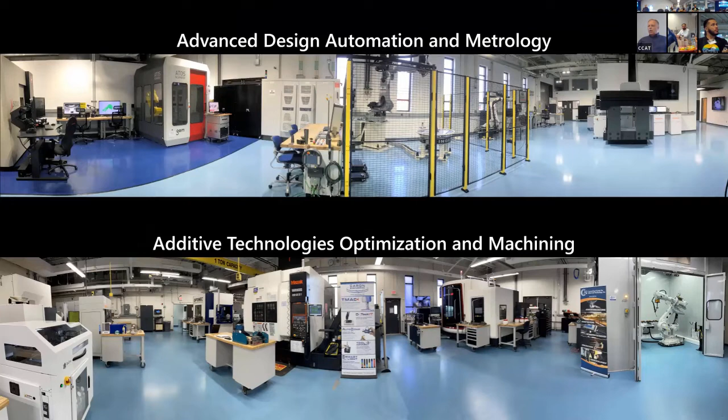So here again, looking out the window is our ADAM lab, from the other end of the room, so you can see a bit more of the equipment in there. The other lab in this building is my lab, the Atom lab—they'll talk more about what's in here. When you look in this photo and combine it with the other area, we have 10 different machines in there, and 8 of them are 3D printers.

So we have the Haas Mini Mill and the Mazak Variaxis—these are the only subtractive machines we have in there. We'll talk more about the DMG, which is kind of both. We also have another lab over at Goodwin University that deals with composites—a collaborative between Goodwin University, Pratt and Whitney, CCAT, and the state. So we're here today to talk about additive—some of the processes involved, some of the types of equipment that we have here.

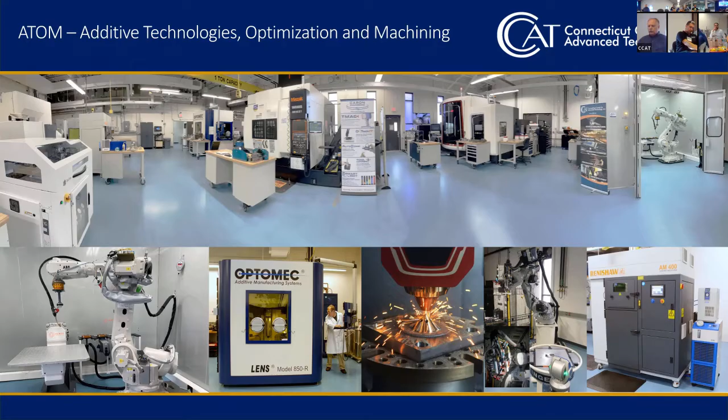So we're going to talk about what is additive.

So before I go any further, who in here uses additive already or has used it? In our tech schools, we have for the last 5 years. Okay, all right. I work in consulting, and a client I work with is applying it to their process and looking to scale. Okay, so it's something that is pretty prevalent.

The technology is pretty prevalent. We're going to beat that to death before we get done, but it's good to see people are using it. So what is it? It's an industry 4.0 technology that uses a CAD model, a computer model, to build a part one layer at a time. It adds material where it's needed. That's how I define it. There's probably other definitions, but that's basically it.

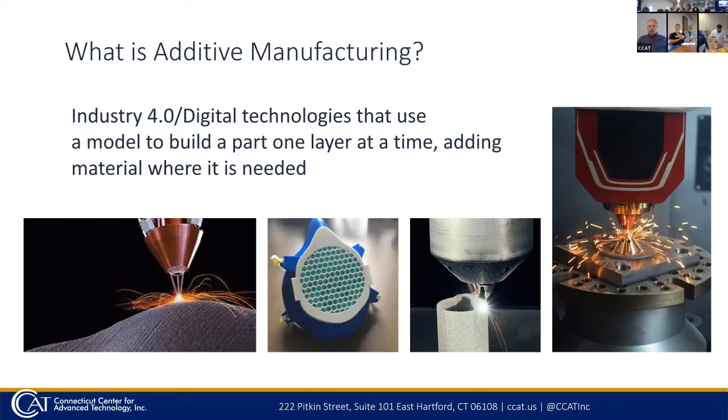What we're going to do is compare that against traditional manufacturing processes, which is what a lot of folks are involved with. Traditional manufacturing is a huge family of different technologies and processes: injection molding, casting, forging, stamping, machining or subtractive like milling, grinding, turning. These are all things that remove material from a feedstock.

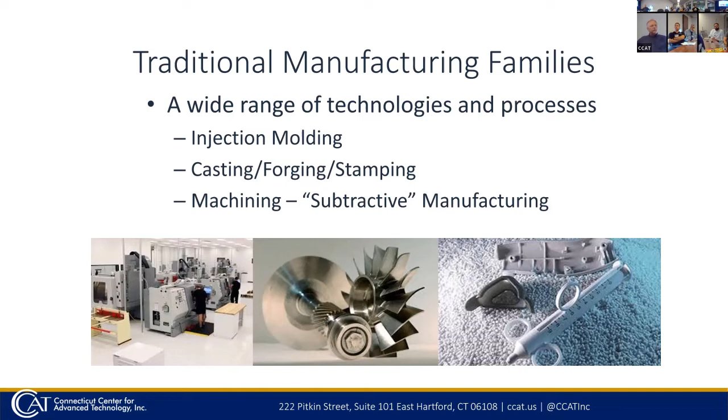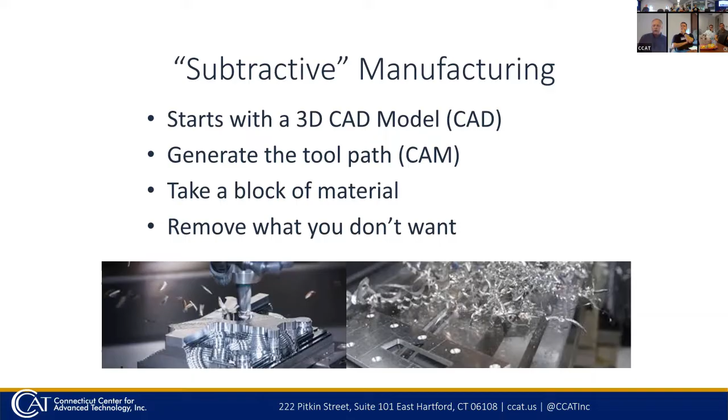So when you look at these processes, we're going to look at subtractive manufacturing and milling in this case. You start with a 3D CAD model—it's a digital process nowadays for the most part. The only thing I can operate, unfortunately, is a manual milling machine, so give me a break for it. But anyway, you generate a tool path. You do your development, look at what tools you have available and what the processes are in order to design the process. You take a block of material and remove what you don't want. Pretty good process—that's the way high precision parts are made today.

And that's the way a lot of parts are made today, and that's how we've made really great things for the last 200 or so years. Since the first industrial revolution, these kinds of technologies have been prominent. One of the issues with it is that you can create a lot of waste material.

We've done projects on our milling machine where we were making a handful of aluminum parts for a company, and I think we ended up with, for us, a lot—like 6 55-gallon barrels of aluminum scrap. When you consider we were making 20 parts, that was quite a bit of scrap. There's also potential for long lead items. If you're finishing a casting or forging, your process may be relatively short, but you can wait weeks or even years in some cases for the casting or forging itself.

We've got a couple of projects we're working on now trying to deal with lead time and things like that—we'll talk more about that. You design for manufacturability of the process. Any manufacturing process you have, you need to design for that process, whether it be additive or subtractive. But a lot of times in subtractive, you can only remove material where you can get your tool into. So you have to make choices between the ultimate design for performance and the design to actually build the part. That's pretty common—at times you have to sacrifice performance or some other aspect of the finished part in order to actually build it.

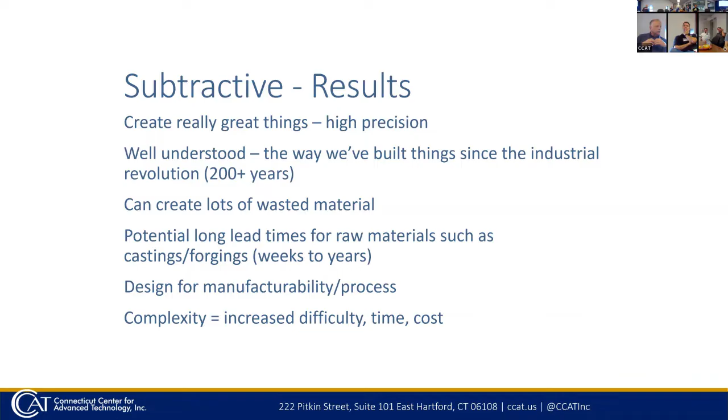And that's part of this process. Typically, the more complex the part geometries are, the longer it takes and the more difficult it is to machine. Is that an accurate statement? Okay, so that's the nature of the beast—the more fixture setups you've got possibly, the more complex it becomes.

Now we're going to compare that with additive. Additive starts with basically the same CAD model—we might have to modify it because, again, we want to design for the process—but it starts with this CAD model. They use programs called slicing programs to do the CAM and generate the tool path, and that controls your deposition, adding material layer by layer where it's needed. So it's a complete opposite view of how to build, compared to subtractive.

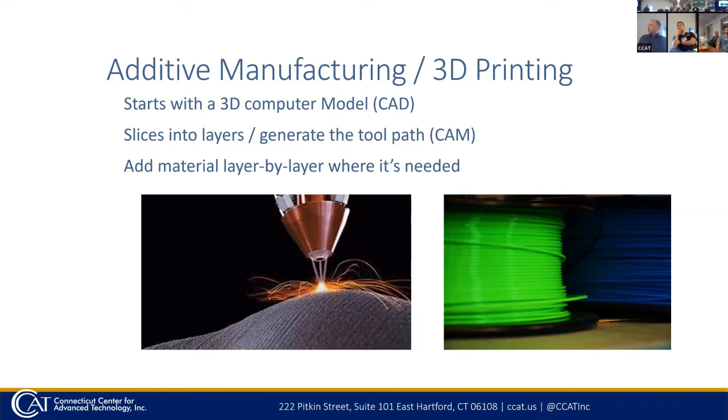Additive manufacturing allows you to make things that can be difficult or impossible to do with some other technologies. As an example, complex internal features are difficult to do with conventional processes.

This is one of the key sentences for this whole thing: additive tools can be applied to reduce manufacturing cost, improve product performance, reduce design and manufacturing lead times, and enhance maintenance, repair, overhaul, and spare parts availability. So that's part of why people are looking at going for additive manufacturing.

We'll probably talk about this multiple times, but there was so much hype around additive manufacturing when it first started coming out. It was going to do everything, replace conventional manufacturing, and the world was going to be a better place because of it. And it's not the case.

Additive is simply another set of tools that are available when you want to make something. There are times additive tools make an immense amount of sense, and times when they make no sense whatsoever—it's harder and more expensive to use that technology than conventional processes. So it's just another tool, and you have to pick and choose when you can use it.

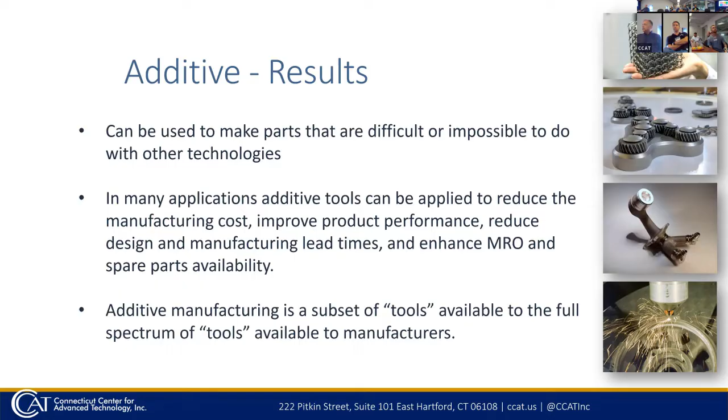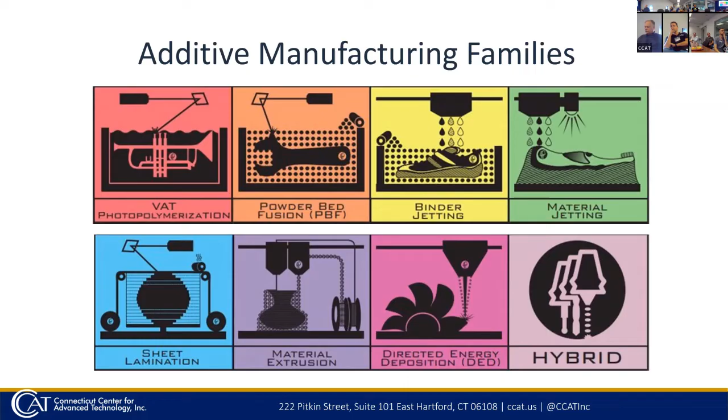When we looked at subtractive, there's a lot of traditional manufacturing processes. The ASTM Standards Organization has defined what these additive families are. There are 7 additive families plus hybrid. Hybrid is simply a combination of technologies, typically a subtractive technology and additive technology combined in one machine. But these are the different families of additive technology—we're going to talk more about those in a couple minutes.

What can you make with additive? Anything and everything. Most people, when they think of additive, think of using plastics. So that's what this guy's for—I've got a bunch of parts up there.

Nylon is a very common material in composites. This guy is nylon with chopped carbon fiber in it. You can do continuous fiber or chopped fiber, but that adds stiffness to it—it's a really nice material.

Additive plastics have been around since the 1980s, and there's a whole bunch of traditional and now some higher grade materials available for plastics—a full range from engineering grade plastics to flexible plastics, inexpensive PLA made from basically corn, to ABS, just a whole range of plastics.

Metals are the same thing. A lot of the machines you'll be looking at when we go down there use a heat source, a laser beam, or they can use an e-beam. Lasers are used for traditional welding processes. The idea of melting metal—basically welding in a very precise, controlled manner—has been around since the 1980s for all intents and purposes.

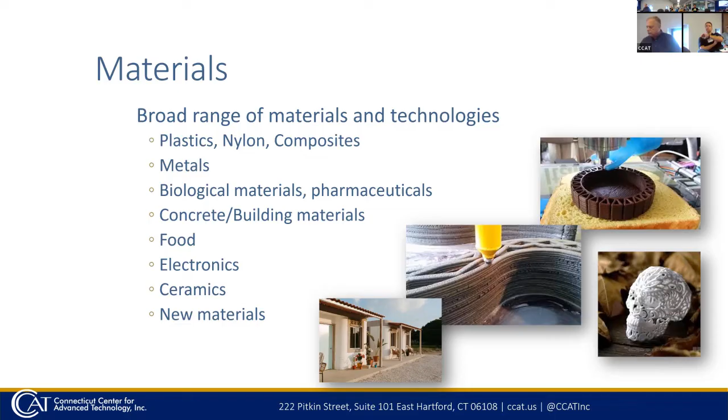All right, so why are people using it? Once again, we talked about the potential to make things faster, cheaper, lighter. This is an example, and there's a part in the middle there that uses topology optimization. This is actually a bracket for a concept car, an electric concept car, and it weighs about 60% of a bracket manufactured traditionally by using these organic shapes. Here's an example, I think this is Airbus related, of a traditionally manufactured bracket versus the additively manufactured bracket.

Create things that are difficult or impossible with other technologies. Once again, this is kind of part consolidation. This was printed from liquid metals, but all of these gears are integral to this system. So this is part consolidation, but it's something that would be difficult with other technologies.

Part consolidation, this is a GE nozzle for the LEAP engine. It started as 20 individual parts that were traditionally manufactured. That means multiple suppliers you've got to manage, and the logistics of assembly. They started building these things additively as a single piece, and then you finish the parts that need to be finished. Last I knew, they had 6,000 or 7,000 of those manufactured.

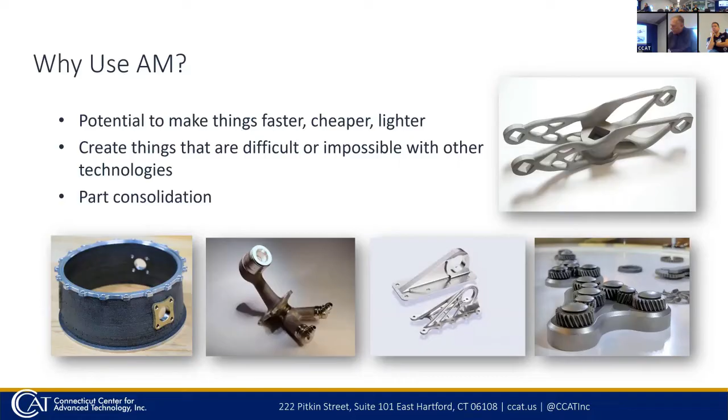There's typically no tooling or fixtures.

Well, hello there. Hey, how's it going? Good, good.

So there's typically no tooling or fixtures involved. A lot of times when you're building, you build in your own support structures, so you don't need external fixtures per se. Once again, designed for end use versus manufacture. If you look at this lattice work structure in the middle, that really didn't take any more time to build and was no more difficult than if that was just a solid block. So it's a very simple thing to do.

When you look at design for end use, here again on the far left is part of a heat exchanger where that was all built as a single part. Free complexity once again, and then very little waste. So when we look at these parts, we kind of hand some of these around to have something here. You can see the level of complexity of a part that you could build, and I don't know how you would build that conventionally. So to me, that's a part that can only be built using additive.

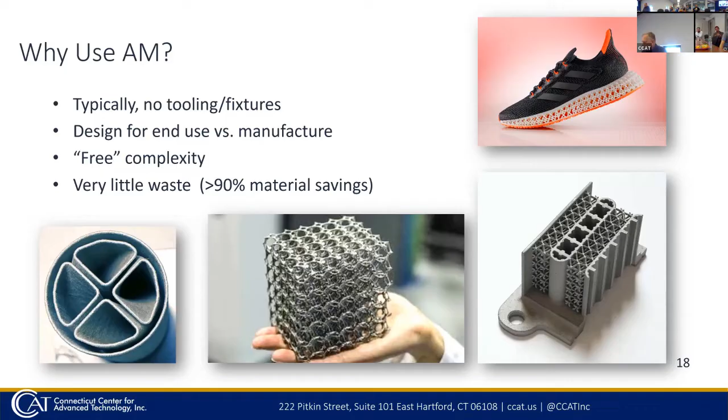The shoe companies up here, Nike and Adidas in particular, are doing a lot of work with high-end shoes being printed. And if you look at the NFL helmets and things, they have that kind of a matrix built into them now to protect the players' heads. A lot of that is being done with additive manufacturing.

So key points: it's rapidly evolving as a mainstream manufacturing tool. It's a subset of tools which we talk about, so it's just another set of tools in the toolbox. And as we said, it's a family of technologies. Some of them are really good at some things, others are better at other things, just like milling is great at some things, turning is great at others. There's a lot of variety available.

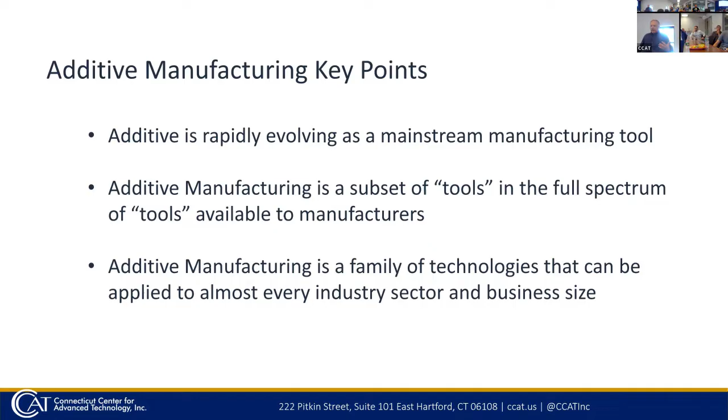So a quick industry overview. Any questions? Okay.

So the additive industry as a whole, and metal additive in particular, is growing at 9 times faster than traditional manufacturing. When you look at that you might say, 'Oh my God,' but when you look at worldwide manufacturing, additive manufacturing is still less than 1% of manufacturing, so it's still a tiny entity compared to traditional processes, but it's growing faster.

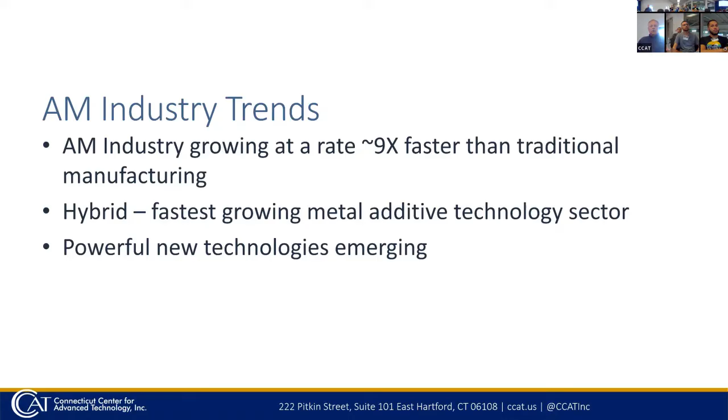So hybrid, specifically in relation to metals, hybrid is growing fastest of metal technologies. We're going to talk a lot about hybrid here in a minute. And there's a lot of powerful new technologies emerging. But the bottom line is that as people understand what additive can and can't do, as the technology and equipment matures and people figure out how to do things better, there's just a lot of growth in the types of equipment and in the kinds of technologies available to you.

So these are just some random trends. Refinement of existing equipment and processes - so everything that the machines are. The first generation machines were pretty much made by companies that said, 'Hey, additive is really cool. If I build a machine that can do this and this and this, I can create something additively.' But they were additive companies, and a lot of traditional equipment manufacturers have realized that additive is up and coming and want to get into the game.

So when you look at DMG Mori, Mazak, Haas, when you look at Trumpf, you look at a lot of different manufacturers, they went out and actually bought these first generation machines. And so the next generation machines are ones that these machine tool manufacturers, who understand building robust machine tools, have made. So the next generation machines are much better.

As an example, we had a first generation machine that was bought by Renishaw. So we bought the first gen, which is basically the same machine that the manufacturer they bought made, and it had no sensors or ability to gather data. That means that from the quality control perspective, you don't have a lot of information to tell you about what you're building.

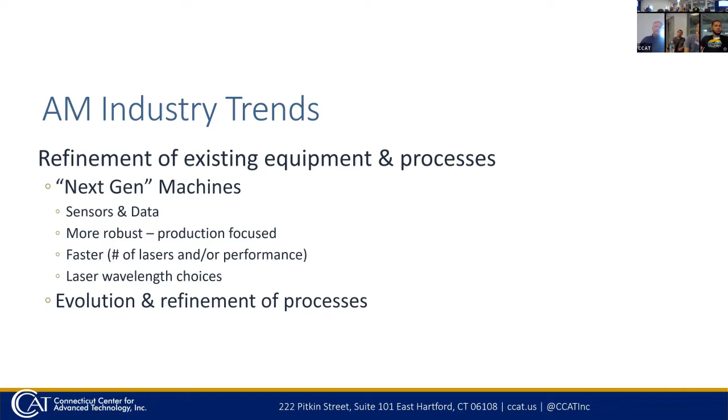Another industry trend is printing bigger or printing smaller. One of the machines that made that hinge has a 10-inch by 10-inch by 10-inch work envelope, so you can build anything you want within that 10-inch cube. They're actually building bicycles in that and then assembling the individual components to make titanium mountain bikes, as an example.

But the idea of printing something bigger than a basketball is huge. There are a lot of different manufacturers making equipment designed to build at a much larger scale. You can build a much larger part, or build a bigger volume of parts simultaneously to speed up the process.

We were talking to an engine and airframe aerospace manufacturer earlier today, and they have some parts that are traditionally done on a machine the size of a basketball. They're printing meter-wide parts, engine casings in particular. They're also going the other way around, making things on a nano level that they haven't been able to do before. It's really kind of cool, both in the high rate additive manufacturing technologies and systems.

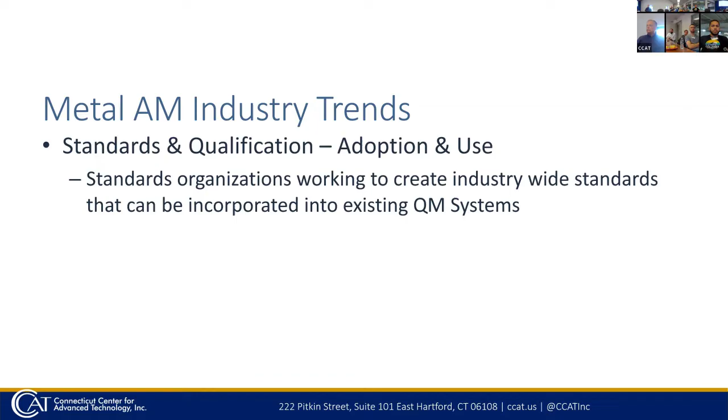It's not a casting in the traditional sense, not a forging in the traditional sense, not wrought in the traditional sense. How does it relate to all these things that the existing standards cover? So what's taking place as an industry is that all these different standards organizations are working really hard to create standards for additive that will let them inspect to these standards so it becomes a more acceptable process. In aerospace, for example, the FAA is very actively looking at how to qualify additively manufactured parts. There's just a lot of that type of thing taking place.

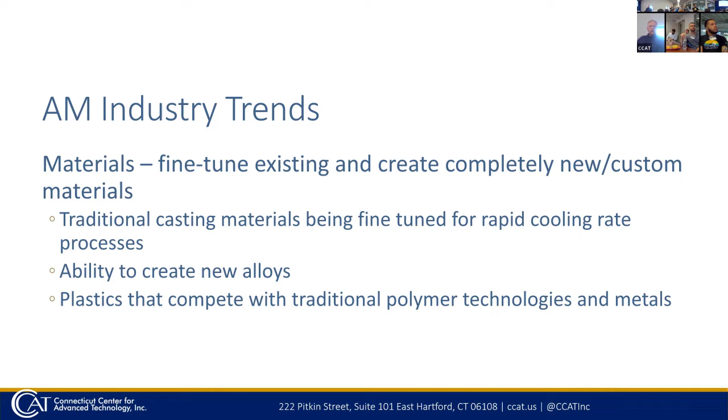We talked about plastics too — some of the new engineering grade plastics can compete with aluminum in particular, and they're lighter in weight. So there's a lot of things going on. What are they using it for? Prototypes and models — additive originally was known as a prototyping technology, and it's still one of the primary uses for it.

You can build something quickly and easily. You can use models to help understand a more complex part. We've heard of machine shops that if they have a complex part coming in, they'll build a plastic model with their printer to see how to fixture it, what it looks like, and then get it figured out before the part arrives.

Aids to manufacturing. This is a fixture that we built for a company. I love this thing. That's a big part. We're going to talk more about all these as we go on, but bridge parts and repair.

A lot of times when you talk about a repair, somebody wants something that's qualified and meets all the specifications of the original part. And that's great, that makes a lot of sense for making a permanent repair. But what if I just need to get my Humvee back to base, or my helicopter back to base? Can I use a bridge part to get me where I need to go that doesn't need to be fully qualified? People are starting to have that conversation.

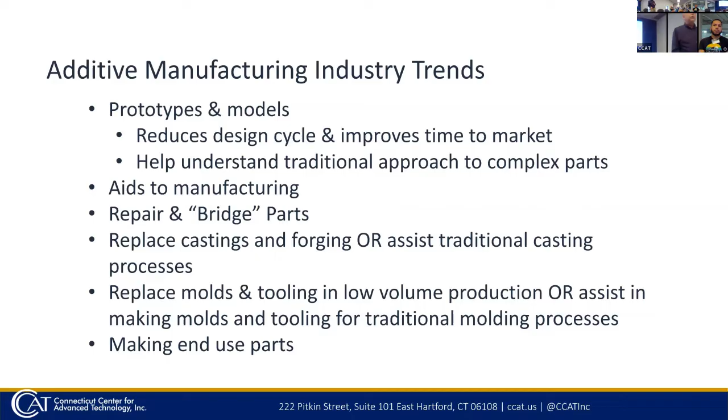So this is a key concept as well. There was a lot of hype, a lot of fear about additive, and it's waning. The reality of what you can and can't do with it well is starting to come to the forefront. People are understanding more how to take advantage of it, how to use it, when to use it, when not to use it. That's why I think it's really starting to advance very quickly as a traditional tool, or as a tool.

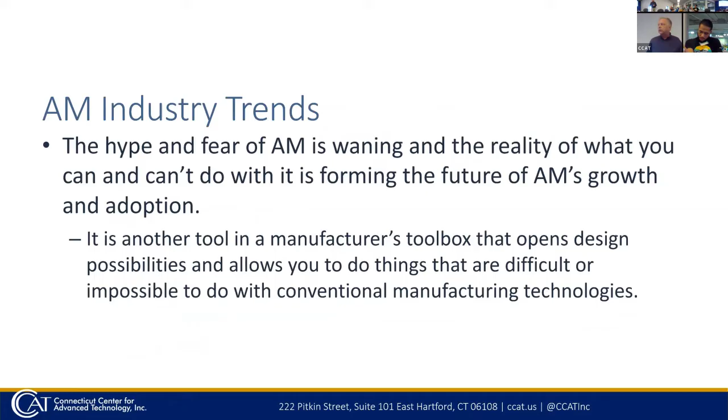I was at a conference last month about additive manufacturing. The people there obviously had a vested interest—half of them were doing additive, the other half were just exploring it. When they asked people how they're using it, 35% were actually making end-use parts with it. That's huge in my mind. 15% were making tools for others, 45% were using it for internal tooling, and 68% were using it for prototyping. So here again, it's a very common application.

Of those people, almost 70% said they're using in-house capability—they have printers in their business. 18% farm out their work entirely, and another 12% do a combination thereof. Their thing was: additive is production without tooling. I think that's a great concept.

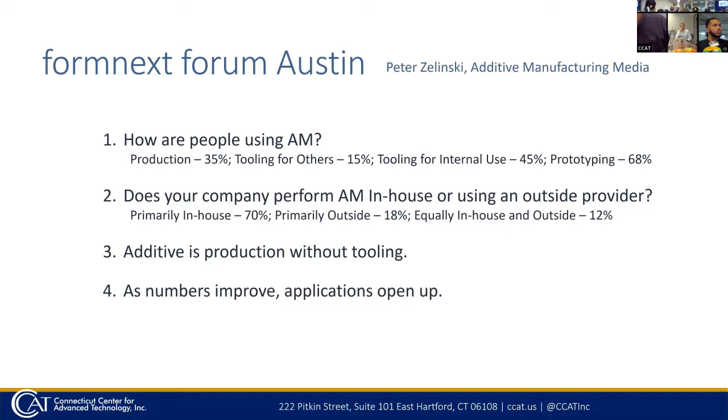End-use parts—once again, a wide variety of applications. These are just some quick samples of stuff, from the aerospace industry, clothes and colors, medical industry. This is actually the part we built that we'll talk more about for the nuclear power industry, and oil and gas. All these industries are using it to build end-use parts.

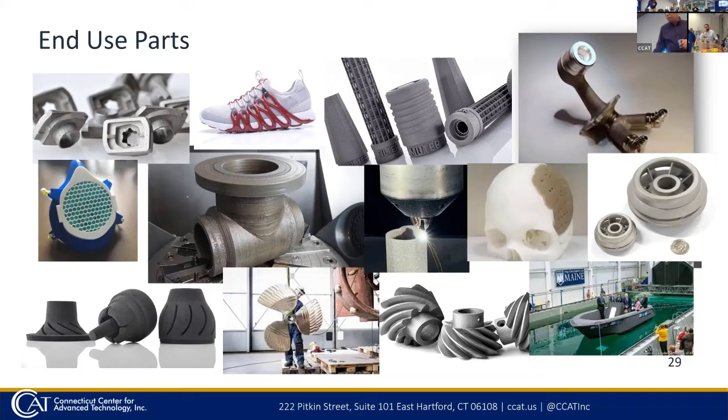Aids to manufacturing—fixtures, jigs, assemblies, anything you need made for manufacturing. I'll pass this around, but I love this. This was a fixture for a company that makes electrical cables. They wanted a method for stripping insulation off the end of the cable, and one of our interns actually built this fixture. He designed it and printed it. It took overnight to print, but that has about $1 worth of material on it.

So I love these. Do you guys know what this art is? It's face shields from the pandemic.

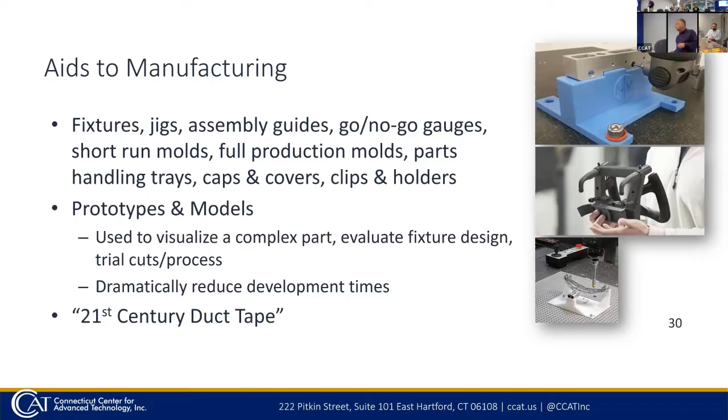There's a wide variety of materials - some of the parts, like we have a Markforged down there, I'm not sure about the others, but you can stop in the middle of a plastic build and add metal inserts and then keep going.

It's cost effective. We've done a number of molds for companies, either for short run injection molding or just for pouring urethane or silicone in, or whatever.

Easy design mods - just put numbers in. We've seen these actually used at customer sites where they've made fixturing or whatever in their process. They put a serial number on it so they can track it in their quality system, and they just print all that in one time.

This is a robot gripper, which is a great application for it. This is a polymer, so it's nice and lightweight, and then this is actually an additively manufactured tip for it, so when you wear out the tip, you just switch it out.

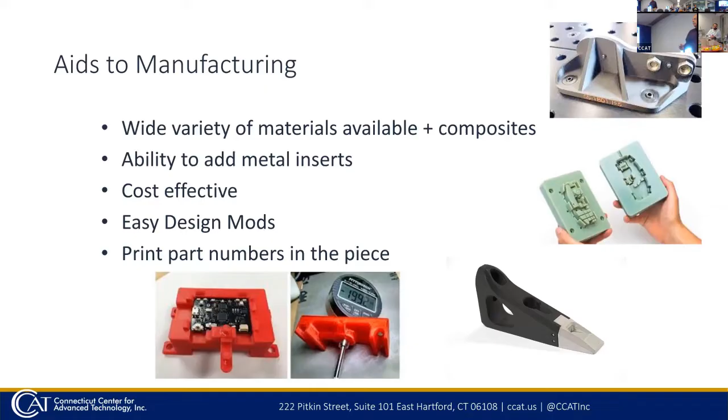Unavailability and legacy parts here again. We've done a lot of work for the Air Force, like with the TF-33 engine. The last new one was built in 1969, so they make some new parts for it, but most of the stuff ends up getting repaired. The Air Force is looking at this 21st century technology to help them do repairs easier and quicker. What takes them hours to do conventionally, we can do in literally a few minutes. So they're very much looking forward to it. And then we talked about the parts.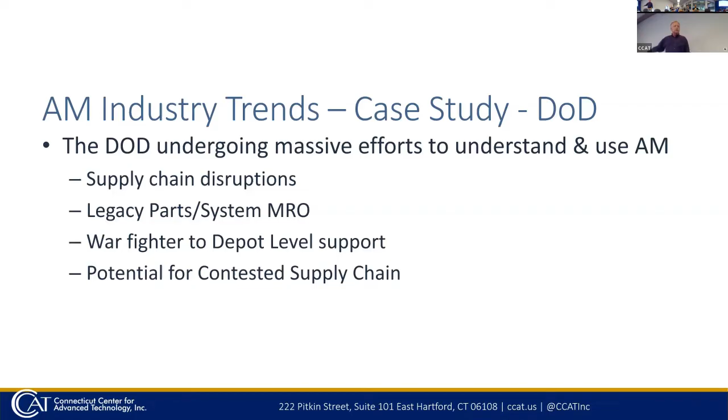Since World War I, basically, we've had pretty open access to our supply chain. Even though we had submarines blasting our supply ships out of the water, most of it got through. But in the future they're concerned about our ability to keep a supply chain going in a contested environment. So the idea of being able to make parts where they need them, when they need them, is an important part of their policies and processes going forward.

So once again, machines have been around for a long while. They're changing, they're getting better. Materials are getting better, and so are the advanced tools.

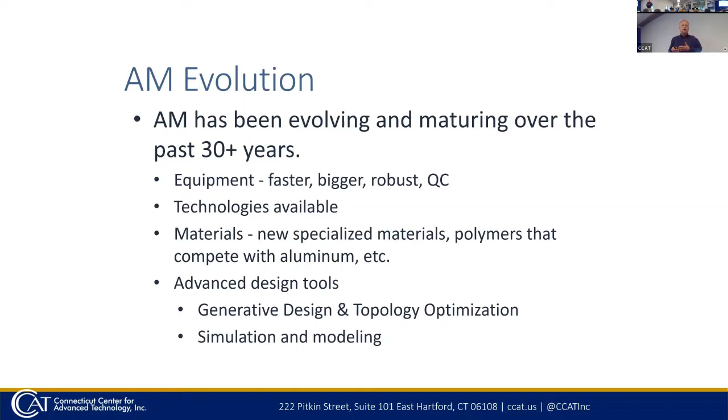We looked at sample lightweighting, the ability to use generative design or topology optimization to lightweight parts. These design tools can help you consolidate parts. We talked about GE's LEAP engine nozzle, but they have an engine they're working on where they've taken, I don't know how many parts are in the engine altogether, but they've taken 812 parts and condensed them into more complex assemblies. Now they have 12 assemblies instead of 812 discrete parts, and they have to use this kind of technology to do that.

Most of this we talked about already. It's not going to replace traditional manufacturing, but it has the potential of being disruptive in many applications. Bottom line is good too.

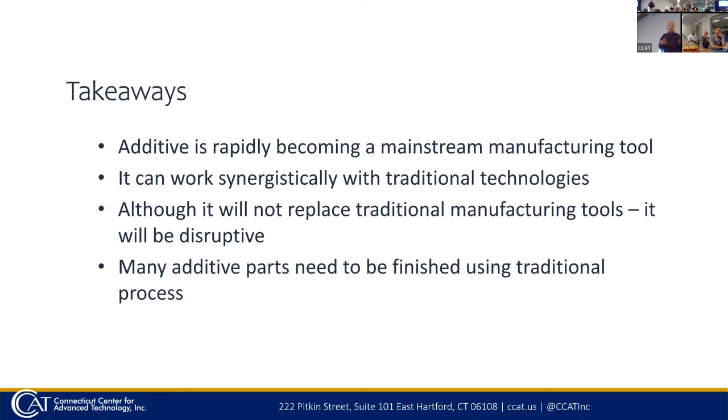Many of the parts need to be finished using traditional processes. Anything we make in metals, if surface finish or dimensions are critical, you're still going to have to probably do some kind of post processing. So traditional manufacturing may shift into supporting this, more as a finishing process than a roughing process. In fact, a lot of additive companies that sprung up just to do additive manufacturing have actually bought machine shops in order to do that. And some machine shops have adopted additive manufacturing technology so they have both available in a single place. That's a really powerful business thing.

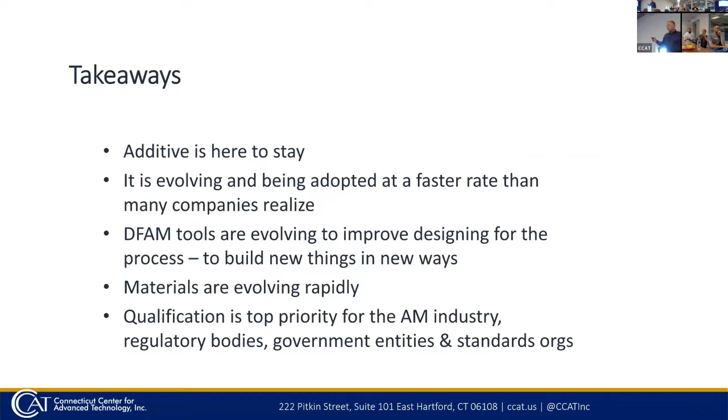It's here to stay, it's not going away. It is evolving and being adopted much faster than many people realize. We talked about the designs for additive manufacturing, design tools are changing as well. We talked about qualification, but to me, this is important.

Every major corporation in this area—obviously aerospace and medical are big—but every major corporation in the world, for all intents and purposes, every state in the U.S., and every industrialized nation in the world wants to be a leader in additive manufacturing. When you look at what's taking place in China, Japan, and the European countries, even in some South American countries, there's a great emphasis on additive and bringing that technology to them.

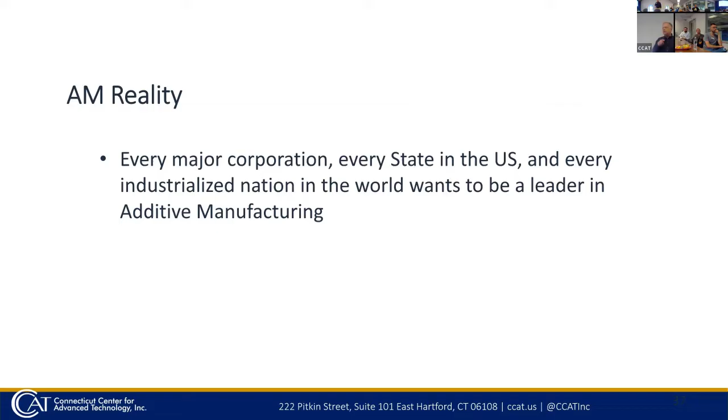All right, everybody all right? I've got probably a lot more slides than I have time for, so we'll take a quick look. Most people that start in additive manufacturing start in plastics - it's the easiest, it's your hundred dollar printer.

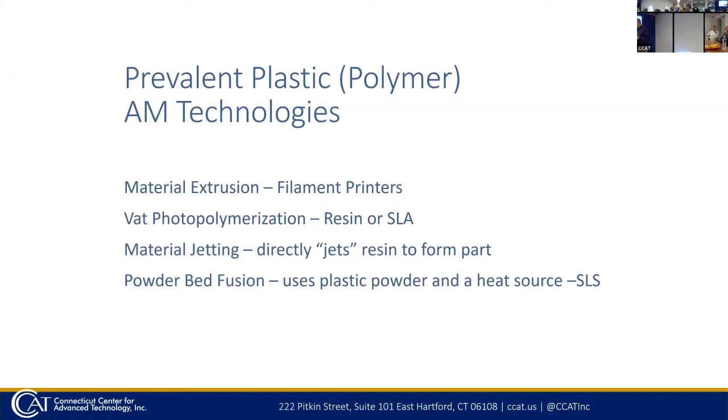When we look at that family of technologies, here's their official names and what they are. We'll take a quick look - this is the most prevalent technology: material extrusion filament printer, so your Ender or a million other different types of printers. You can buy material here for a few dollars a spool, made from corn basically, up to several hundred dollars a spool for engineering grade materials. So a wide range of materials. This is one of our printers.

This is the one downstairs, our Forge - this is a Prusa. When that was new, I think it was a thousand dollar printer, that's really what it did. One of the guys mentions he just bought one of those for work too.

So this is actually a model that we printed - an aircraft fuel component from an antique aircraft. We scanned this in with our 3D scanners and then printed the part from that. This is a part made from Ultem, part of a duct system. This is as strong as aluminum at a fraction of the weight.

This is a fixture that we made, it's got a curved surface - I'll show you the part that this held. But once again, how would you manufacture that? How long would it take you to machine it? That's probably the bottom line, and probably the other way you'd do it. So there are a lot of reasons for this.

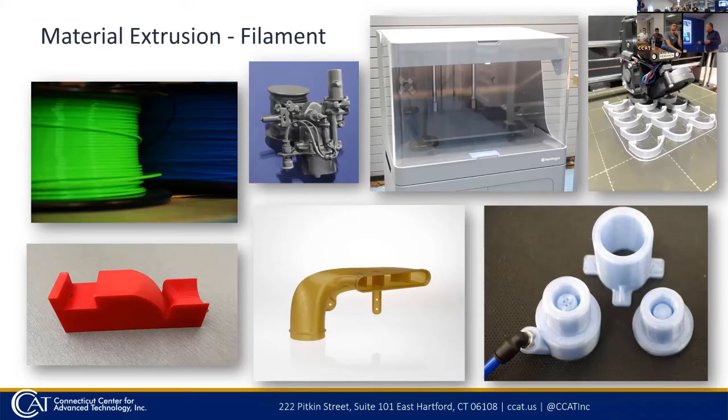Here again, the materials range from a wide variety of traditional plastics to flexible materials, and things like that. So depending on what you're doing, this may be an alternative - we can talk more about that individually.

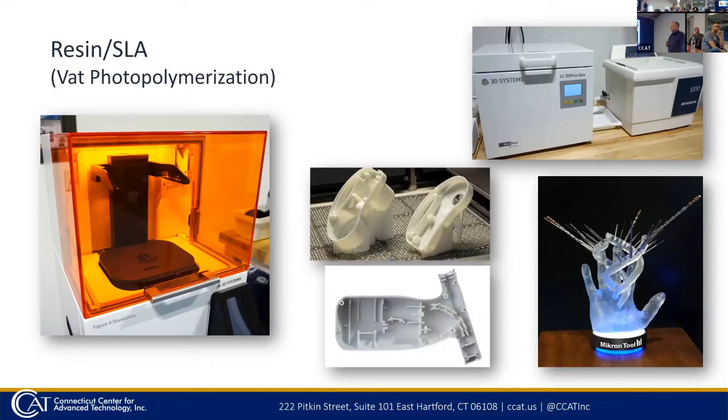Material jetting - this is traditionally thought of more as a manufacturing process rather than a prototyping tool. I don't know any shops that have one of these, though I know service providers that sell parts from these for a living. In this case, the material that's jetted is the actual build material - it's a plastic polymer that's UV cured, adding another layer. It sprays material where it's needed to create the part. The beauty of this is you've got multiple colors available and multiple durometers of materials available.

You can also change durometers, so you can mix materials that are flexible and ones that are stiff, and vary the mixture to create different durometer levels. There's actually a medical application we're studying, making models for doctors to practice surgery on. Each of your tissues has a different sponginess, so they've explored how to vary the durometer of the materials to match the real tissue, so it looks and feels like an actual surgery.

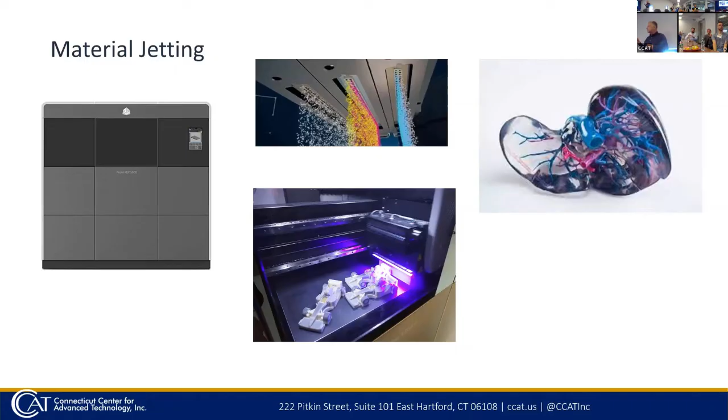Interesting, and powder bed fusion, so selective laser sintering. There's a number of plastics and materials that they use, possibly one of the nylon ones. You start with a bed and a plastic powder, and a laser beam writes across it, melting that layer, then it drops down and spreads a new layer, melts it, drops down, spreads a layer. Particularly with the nylon materials, you can create incredibly robust parts with this, so a lot of people use it for end use production.

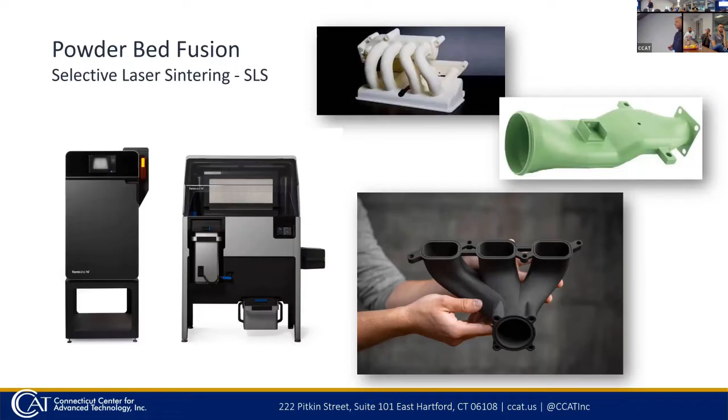Each of these machines has a bunch of different manufacturers, different sizes, different features. Any questions on the polymers? That was kind of a quick dive.

On the metal side, once again, these are the families. Some of them are sinter based, we'll talk more about that. Some of them use a heat source to actually melt the powder, typically a laser or an electron beam. And some of them don't melt anything - the solid state process is a good thing.

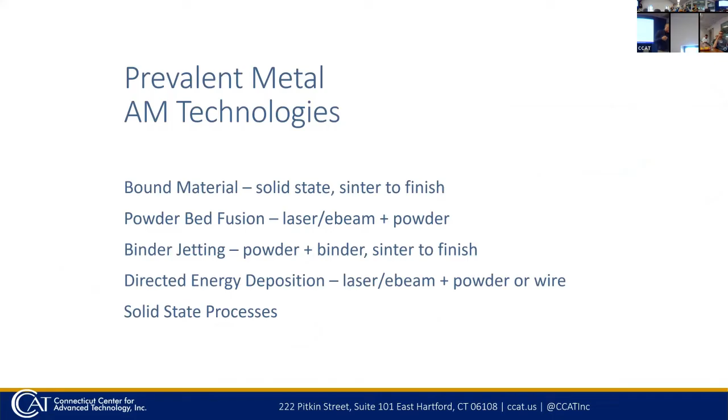Bound metal - when you go out in the lab, we'll take a look at it. It starts with a filament typically, or a rod. Some use a slurry or a liquid, but the ones that use a rod or filament look like a plastic printer. It's using the same technology, except the filament is a waxy polymer that's impregnated and filled with metal powder. You're actually building a part that you then end up debonding and sintering to solidify.

This is an example made from copper - a heat exchanger with a part built into it. That took a few hours to make, and then had to go through the sintering process, which is I think a 2 or 3 day process. In between you can see this white material - this is the boundary layer, using a ceramic material that lets you just snap it off. So you don't have big problems with support removal like some of the other processes. This is a part that was made with it.

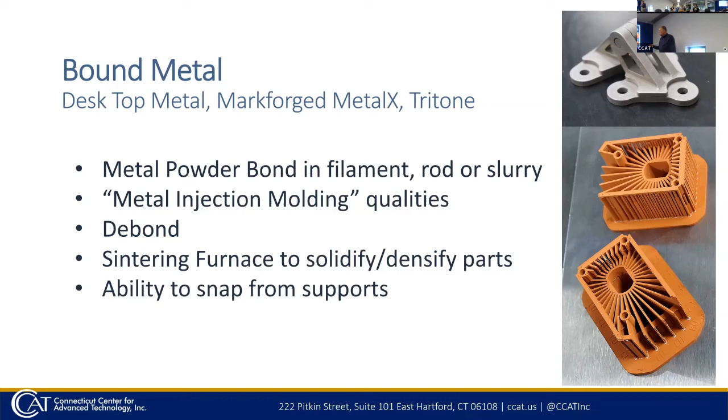We'll take a look at the process real quick - this is the Desktop Metal system. Instead of a filament, they use a rod. You print it with a printer here, just like a filament printer, it builds a part, and then you end up with results similar to MIM.

That's an important thing to know - the rods come in common materials. I think it comes in 17-4 or 625, and a tool steel, though I'm not sure which one. Many different common materials are available.

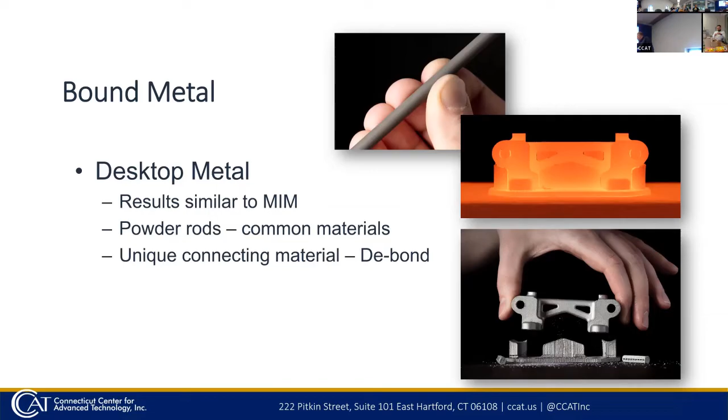Here again, we talked about the bonding between the two layers - it's a ceramic so that it'll break easily, then you sinter it. Compared to other metal processes, this is really fast - really fast when you look at the printing. When you add in the rest of the processing, it slows it down a little bit, but we're going to talk about that.

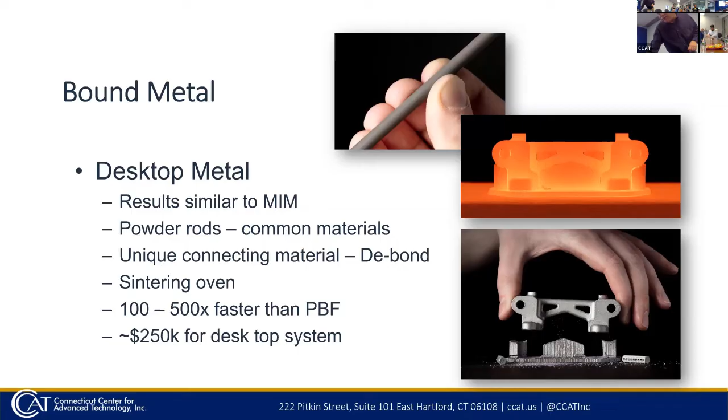About 250K to get started, so this is on the low end of the metal spectrum, making it more affordable for some applications. Here's the case study for this - I can tell you this is an EDM shop over in Farmington.

So they were spending $250,000 a year in tooling from outside sources. They started using bound metal systems, the desktop metal one we were just looking at, to build their fixtures and tooling. Every one of their EDM machines, and I think they have close to 100 of them, need metal fixtures and tooling.

They showed us a part that they made using the desktop metal system. It took them 3 days to print it, 4 days to sinter it, so a full 7 days of processing time to build the fixture. They took it out of the machine and had their shop either EDM or machine it wherever needed, or put in inserts for cap holes or whatever.

The total cost for them to do that themselves was $200. They had paid an outside company $1,200 to make that fixture, so that's $1,000 savings. Their return on investment was 9 months - the machine paid for itself.

They were able - this isn't necessarily a good thing - to get rid of their tool maker, but they helped him get another job. Tool makers are hard to come by, so he wasn't hurt by it. Now they're building almost everything in-house with that added piece of equipment, and they still send out a little bit of stuff, but not much.

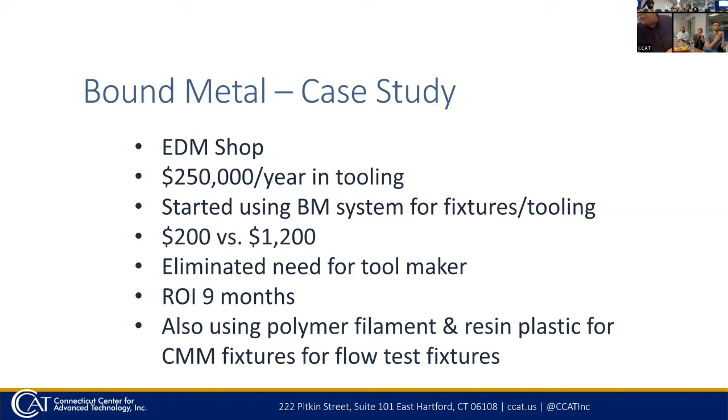All right, any questions on polymer?

Here again, several companies available. There's some really cool things.

All right, powder bed fusion - that's the machine we had downstairs with the 10-inch cube. It starts with a flat build plate and spreads a thin layer, about 50 microns thick, of metal powder. A laser beam steered by a mirror system directly melts the powder layer by layer - drops, spreads, melts, repeat. When you're done, you have a box filled with metal powder with your parts in the middle. It's probably the most prevalent technology in use today for building metal parts.

This is a part we were talking about earlier - this is GE, a meter-wide part. That's the state of the art right now, about a meter cube that they can build parts in.

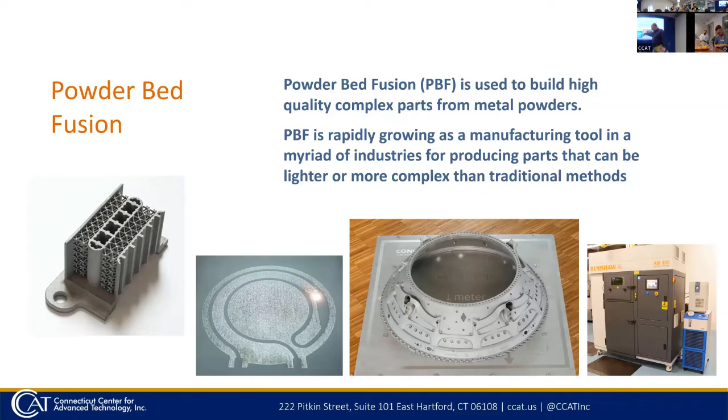So these are some parts that we've done here. This one in particular is a catalytic converter for a fuel cell company, and it has 750 micron holes that run the length of the part. They originally wanted us to just build a bunch of these and weld them together, so we said why don't we just build this as a single piece. We built it as a single piece, and all we had to do was weld the cap.

We talked about casting replacements - these are a couple of pieces that were normally cast, for a company up in Enfield. They needed about half a dozen of these to finish a customer order, and it was a 6-month lead time for their castings. There are probably other processes you could use, but we were able to hand them the parts in 2 days, and we did 25 of them.

This is a prototype - anybody guess what that is? An ice cream scoop. So we work with all companies, all technologies.

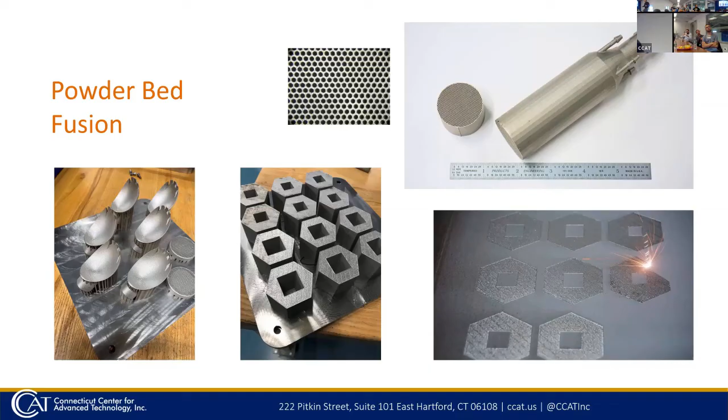Once again, most of the sinter-based processes give you the equivalent of metal injection molding, so it's not necessarily fully solid. Some of them you can actually infiltrate with bronze, so there's some marine applications where that comes in really handy. And you can not only do metals, but you can typically do ceramics.

That's the technology that the casting people are using to make molds with as well, sand molds. So once again, if casting is the way to go, that's fantastic. But if you need one, or you need 6 or 10 of them, you don't need a mold to do that. You're direct printing it, so it gives you the ability to do that.

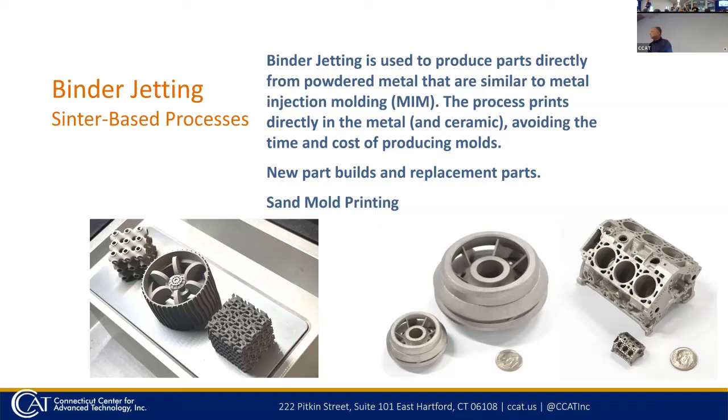Okay, directed energy deposition. This is another of the technologies that we have here. In this particular technology, we start with a build plate, and a laser beam comes down, forms a melt pool, and we're blowing metal powder into it. Then it moves up, and we do another layer and another layer, until you end up with your finished part. You can see this is quite coarse, we make pretty big layers with this, so it's quite a coarse finish.

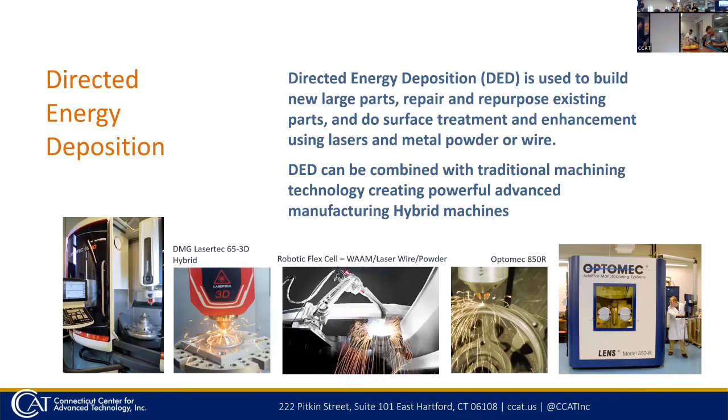So once again, some kind of post processing of surface finish is important. But that's a piece made from titanium, a part of a tool that we made for somebody. Once again, I don't know, you have to explain that maybe. And once again, what would the dies cost in order to achieve that? So we have a number of different pieces of equipment, and we're going to dig into a little bit more.

So they're using it for new part builds. All these can be used for that. We do a lot of repair work with ours.

One of the cool things with this technology is that we have multiple hoppers on the machine, so that means we can spray different kinds of materials. You can mix them together and help people develop new alloys. But you can also start with one material and then braid off to another, or switch between materials - the idea of a functional graded part. If I need heat resistance somewhere and abrasion resistance somewhere else, the possibility is there to do that. It would be very hard to do that on a commercial basis right now as far as quality control and utility goes, but there's a lot of people looking at that as a potential process.

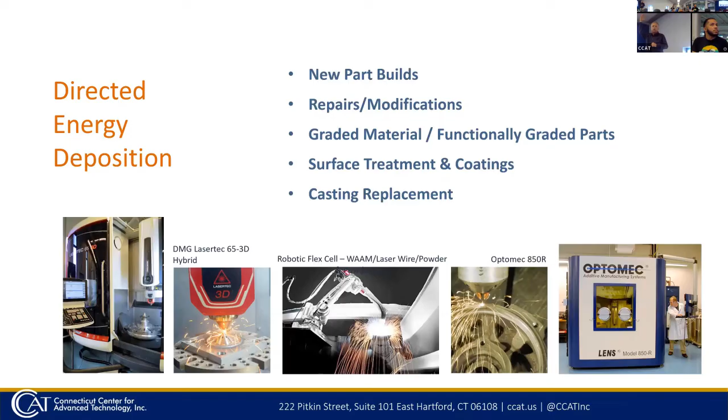Surface treatments and coating - one of the earliest uses for this technology is cladding. This technology has been around for a long, long time. People do it in order to create a surface that's wear resistant, chemical resistant, heat resistant, whatever. A lot of the concept behind this is casting replacement, where this is faster than some of the other technologies. So it's kind of in the middle - a part that we want as a casting replacement. The metallurgy from this is casting, high-end casting or better, so we typically get wrought quality from it.

With additive, I can only build where I can get my heat source when I'm using a laser-based process, and I can only machine where I can get a tool into. But if I combine them both into a single machine, then I have a kick-butt machine called a hybrid machine. And so this is our DMG, and we'll now take a look at it.

This is the normal spindle up here. It has a 60 tool changer on it, and the head kind of folds off into a little garage to keep it out of the way. But you can switch back and forth between the technologies whenever you want to.

So let's say we're building this part, which we'll get a look at. This has some sharp edges. So the engineer started that with a flat build plate, added and created this trumpet section, turned it on the mill turn machine. Then he used full 5 axis, added the fins onto it, and then finished machining it.

That particular part was made from 316. That was under 5 hours from flat build plate to that level of finish. That was made hollow - it could be made solid. But we think to make that with a conventional machine out of a block of 316, that's probably 10 or 12 hours. I'm not sure, but most of that's probably going to be roughing. With this, you're really doing one roughing cut and then doing the rest finishing.

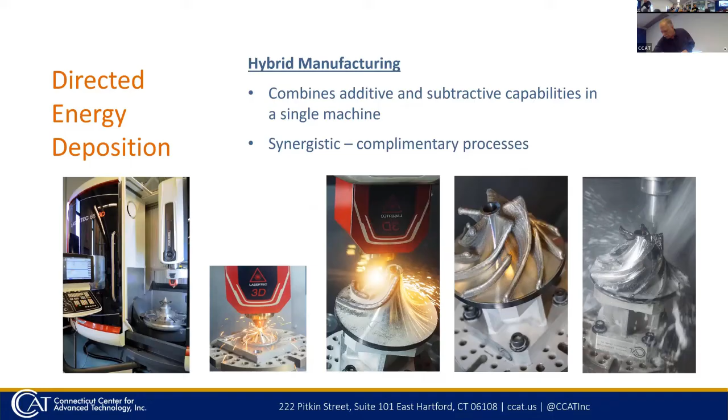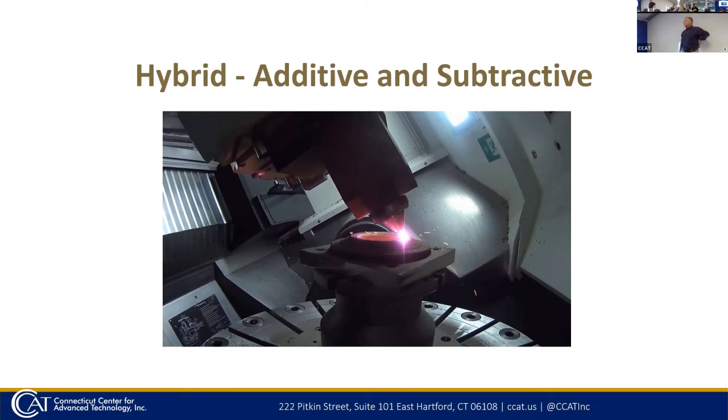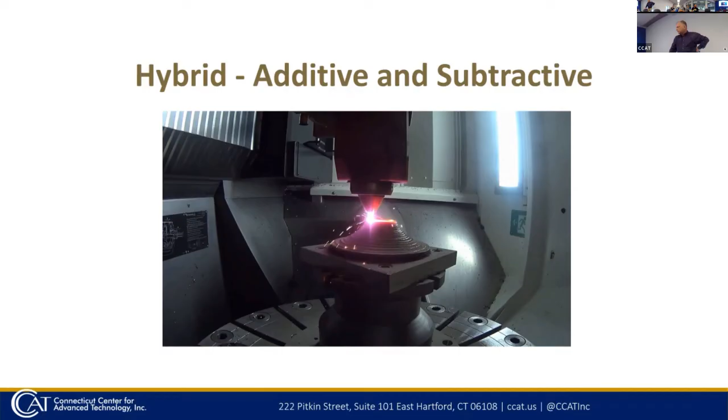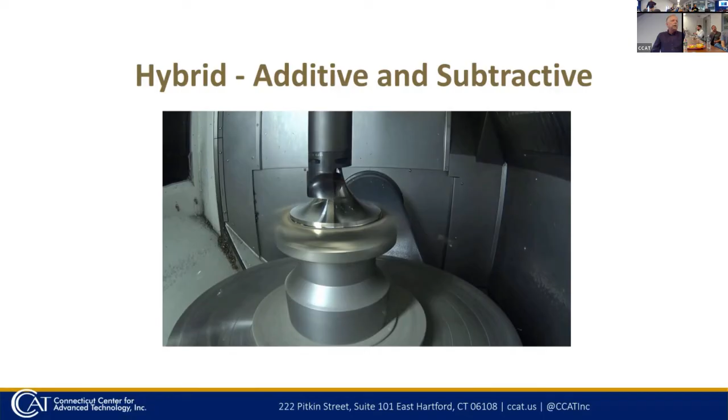We've got some other things we'll take a look at now. That's starting out - it had started with the flat build plate, building the trumpet section. Here again, the machine is full 5-axis, so it can do milling or additive in full 5-axis. And then that's obviously the turning. He's showing this being turned dry, but we can wet machine as well in that process. And then full 5-axis here again, adding the fins.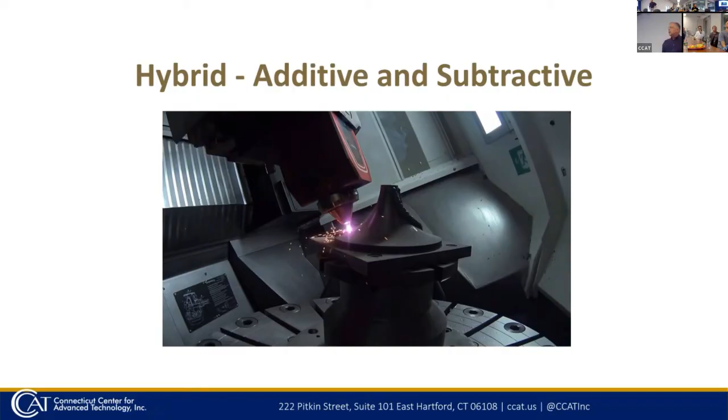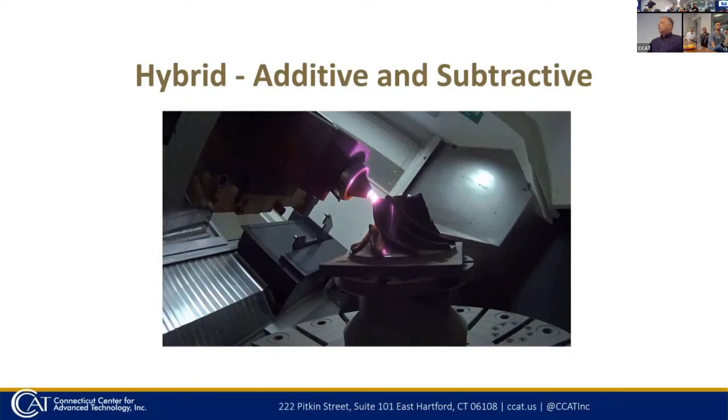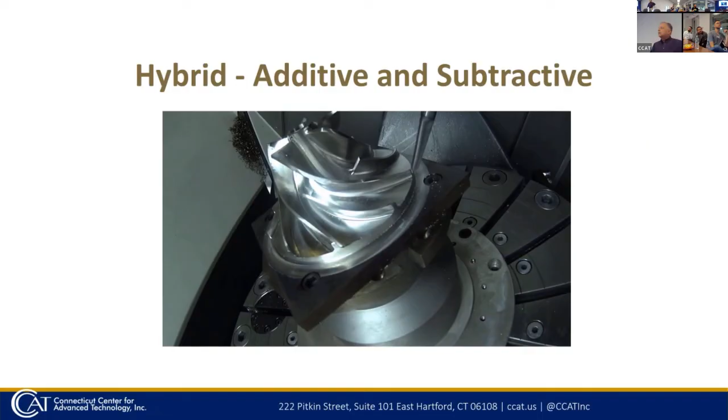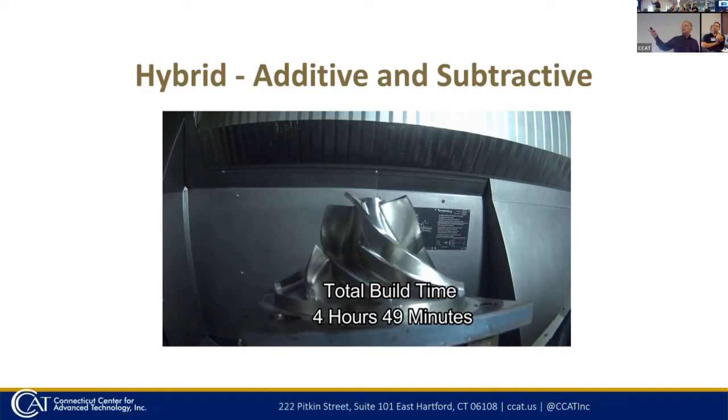Probably 80% of this machine would be in machinist. So it takes a lot more skill, and it's easier to learn the additive part of it than it is the machine. That's the latest and greatest in technology right there - yeah, for all intents and purposes. We've had the machine, and this technology has been evolving as well. That's amazing - yeah, and so we've had this for 6 years.

But like I said, more and more companies are getting into it. So some of the projects we worked on - here again, this is a 220-pound valve housing for the nuclear power industry. Once again, their problem is lead time. And so if they start to get cracks or cracking in a fitting like this, it can shut them down.

This was a project we did for NASA. The space shuttle main engine is being used in the space launch system. That engine is made from 1980s technology and 1980s materials, and materials have far eclipsed what they had available to them then. So they're looking to do a totally additive manufactured engine within the next 10 years. This is a liquid oxygen inducer for them, and then we talked about this being Air Force repair.

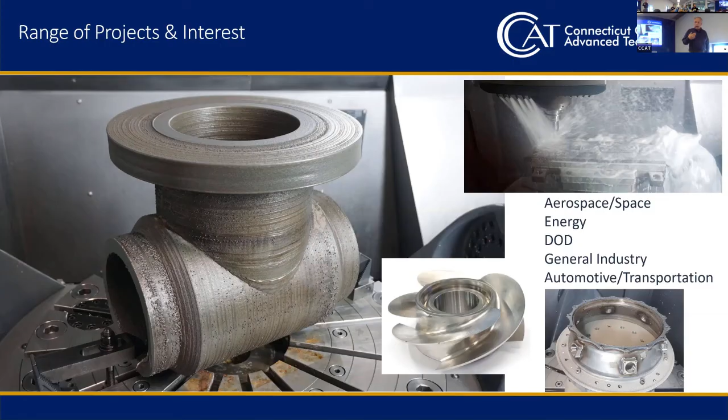We've added some bosses on here, but basically we'll be building some of the structure around there. We're doing a lot of aerospace repair with our machines upstairs.

And our other tool that we're going to take a look at is WAAM, wire arc additive manufacturing. Once again, the idea of building big is an industry trend. So when you look at this, we have about a 6-foot square on top of the table that we can build in. And so the first project we're doing on this machine is with the Navy.

We're doing casting replacements, 250 to 500 pound structures. We can interchange heads. So this has a cold metal transfer similar to MIG, soft plasma similar to TIG, and

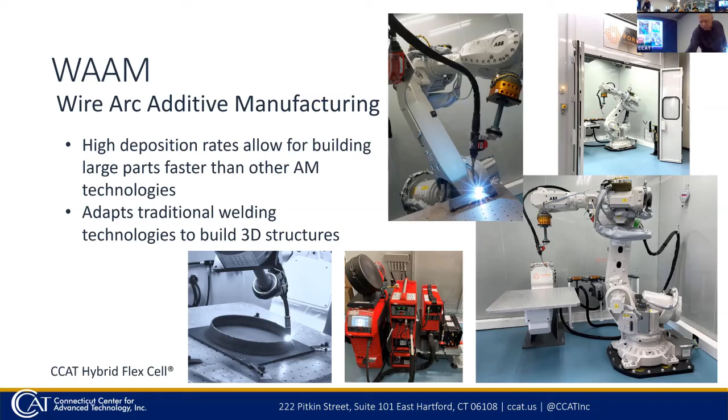It's up and coming. When you look at its application in the industry, so this is GKN aerospace. This was at Oak Ridge National Lab. I think they moved this. They got an additive center in Texas, they just moved this to. So they're using it primarily for airframe development.

And this is from Relativity Space. So this makes rocket fuselages. This will print a fuselage 24 feet in diameter by 120 feet long, and it'll take them a few months to do that, but it's much, much faster. And here again, they're consolidating thousands of parts into a single structure.

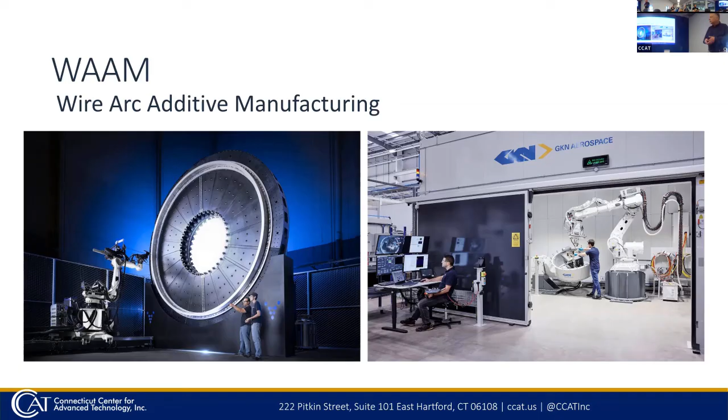From neat applications for it. Solid state processes, I don't have photos up there. Oh, I do have one on the next one. Friction stir additive manufacturing - you guys have heard of friction stir welding.

So this is now, all right. So basically, you take metal, I'll just say metal rod, and you push down and rotate it. The friction literally gets it hot enough to become plastic, and it welds it together. With friction stir additive, it's the same thing, but instead of welding plates together, it ends up building a layer. Just like the other additive technologies, you just build that up layer after layer.

You get some amazing metallurgy with it, and take a look at something else they're doing with it. Cold spray - they're using similar powders to what we use, but they're accelerating them to 2 times the speed of sound or more. The impact of the particles heats them up a little bit, but the impact of the particle fuses it into the layer underneath there.

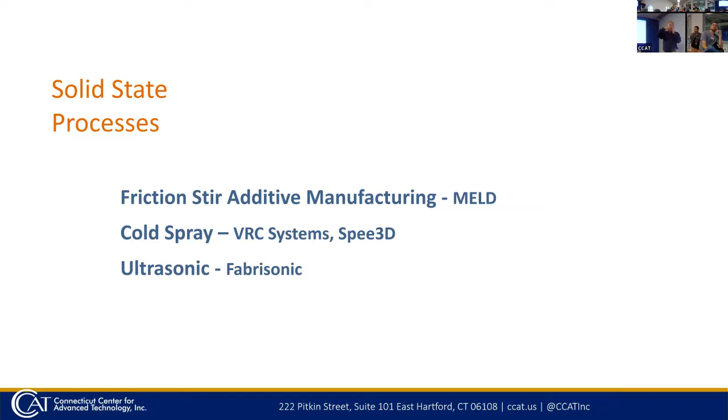And then ultrasonic is literally using ultrasonic energy, and they use foils as a feedstock, so it welds the part together using ultrasonic. So if we look at ultrasonic, this company Fabrisonic does it. This shows the foils back here, but this is a great tool for doing mixed materials. So they're doing a lot of work for like the satellite industry, doing heat pipes and heat exchangers, with copper for heat conduction and then corrosion resistant materials on the outside or whatever.

This is a part that was made with friction stir. You can see the layers, very coarse, but it builds very quickly. So you're making near-net shaped parts and then finishing into your final shape. These are some rings that they recently done.

The world's largest metal 3D printer has been built and is being installed, I think, out at Rock Island Arsenal. So they're going to be printing tank hulls. I mean, this machine is the size of this room out here in the lab, for giant structures.

And shipbuilding, we actually use that. The Department of Defense, aerospace, and the marine industry are very interested in that, both for building new parts, replacement parts, and for doing repairs like on the hull, or repairing the armor on a tank.

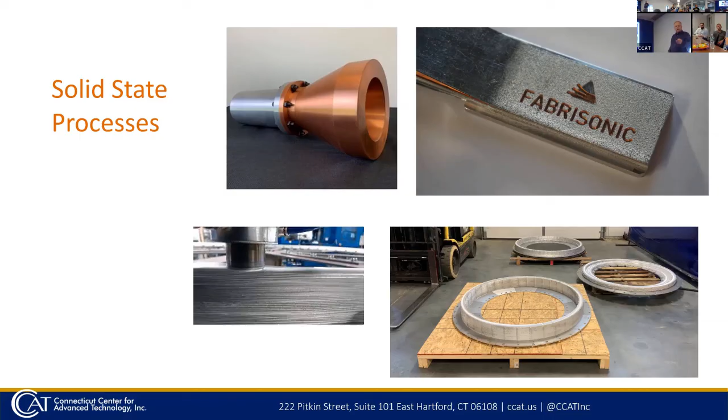Amazing technology. All right, any questions about any of the stuff that we talked about? I'm running long, okay, so we'll very quickly go through the rest of this.

Joe, you had a question from the audience that you wanted to help ask. Thank you. You're very welcome. So Jason from the workplace, and anyone on the phone, can also unmute themselves and ask. But Jason, I'm going to ask this on your behalf.

Are there accelerated training opportunities for additive throughout Connecticut? The answer is we're working on it. Part of some of the programs we're involved with is going to be doing more training. Right now the answer is no, there really isn't. There may be some available at the tech schools from an introductory perspective, but there's not really anything more advanced that I'm aware of in the state, even at the university level at this time.

So, getting started. There's a whole bunch of different questions, this isn't meant for you to absorb, but you really need to ask yourself when you get started, to help you down-select. How big are the parts I want to build with it? What kinds of materials, how complex are they? How many do I want to build? What are the skills and abilities of the people I have on staff?

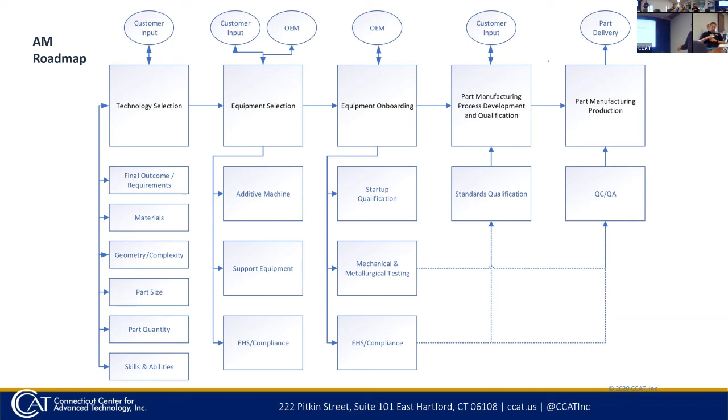But like anything else, you want to start with the end in mind. So once again, you need to really figure out what it is that you want to do. And if it's just to get introduced to it and see who's going to use it, then your $300 Ender printer is an excellent choice.

When you are buying things outside of the filament printer, you want to make sure you understand the entire process, because sometimes the other things associated with the technology can be very expensive. As an example, in powder bed fusion, you are going to be using metal powders, so you have to bring that into your EH&S program. You're going to need a sieving station, you're going to need respirators, you're going to need a wet collection vacuum cleaner. So there's a whole host of other costs outside of the cost of the printer by itself.

Important to understand infrastructure and onboarding considerations, once again. Some of the technologies, there's really none to worry about, it just plugs into 110 volts. Others, you might need special ventilation, or even with metals, you may be required to have a special fire system. So there's infrastructure things to be considered.

Post-processing: on the plates we showed you before, with ice cream scoops on it, there were support structures, so you have to be prepared to remove them from the build plate. One of the things we learned quickly is that our EDM machine at the time didn't have a big enough throw to put the plates in and cut them off well. So you want to make sure you understand what you need to do in order to do that.

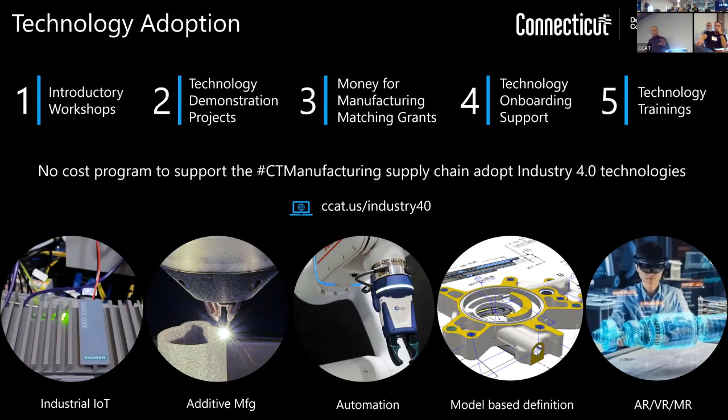One of the things with my existing state program is we're going to be trying to bring in or be able to do some certified training in it. There's organizations out there that do that, so we're going to bring the resources here to do that.

My program from the state, the ATAP, the Technology Adoption Program, that's what we're just finishing talking about. If you're interested and you don't have a 3D printer, or if you have one and want to try a different one, we have a quick start program. We have 3 Mark Two printers that we'll loan to you for 6 weeks. We'll take it, bring it to your company, set it up for you, train you how to use it. You're given free rein with it. In 6 weeks, we come back and pick it up.

You need to buy the material for it, is what I'm saying. So what that will give you, number one, if you're interested in additive and you don't have a machine, this is certainly a great way to get introduced to it. If you have additive already, the Markforged has chopped carbon fiber, a couple other plastics, and a flexible material. The machines that we have can actually do things like this - this is a nylon part, but it has carbon fiber filament underneath it. So you can get really creative with it and produce some really robust tools and stuff.

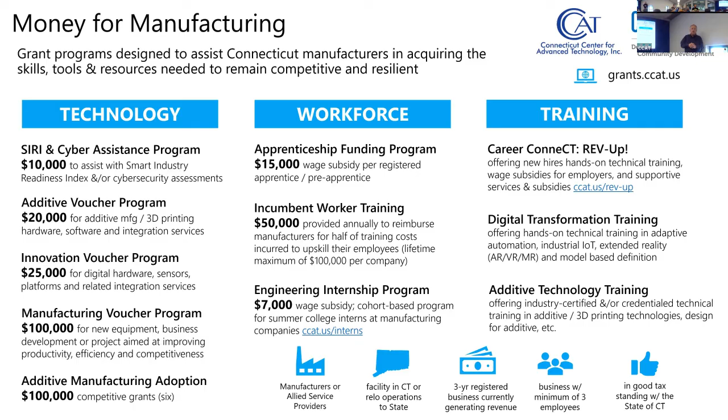So look out. Okay, we have other funding opportunities. Eileen is here to cover any questions about other funding opportunities for workforce and training. So if you have any questions about any of those, Eileen can fill you in on those.